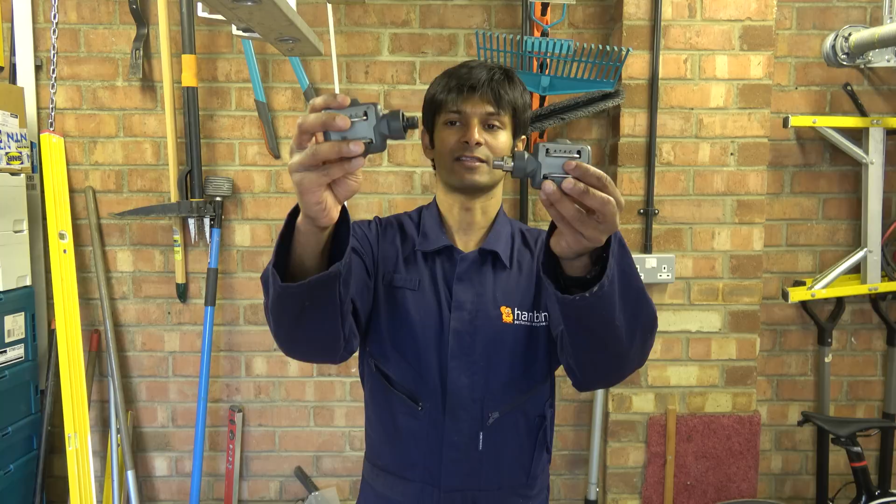Now these are a favourite of fixie riders, they all seem to use these, I'm not quite sure why. Anyway, the chap who sent me these has got a heel-in pedalling style, so what he wanted was the axle extended. So that is the new axle, that is the old axle. He couldn't quite muster pedal extenders because they would extend too much, like 14mm, and the usual trick of adding a couple of washers behind the pedals wasn't enough.

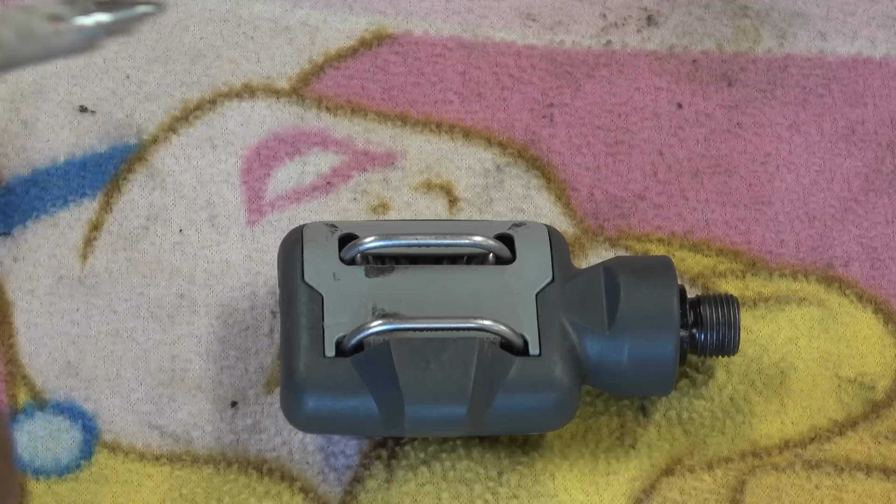So in this episode, I'm going to talk you through a teardown of this, which I'll tell you now is very well engineered, and this. So this is the Time ATAC pedal that the chap sent me. It is of, I suppose, late 90s, early noughties, probably even earlier than that, vintage. It could even be late 80s, I'm not quite sure. This apparently is one of the cheaper types that Time do, but nonetheless it is extremely well engineered.

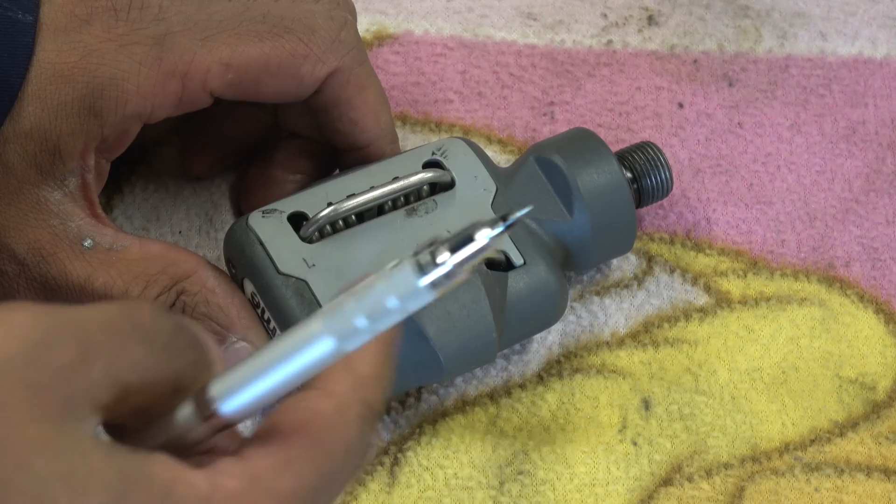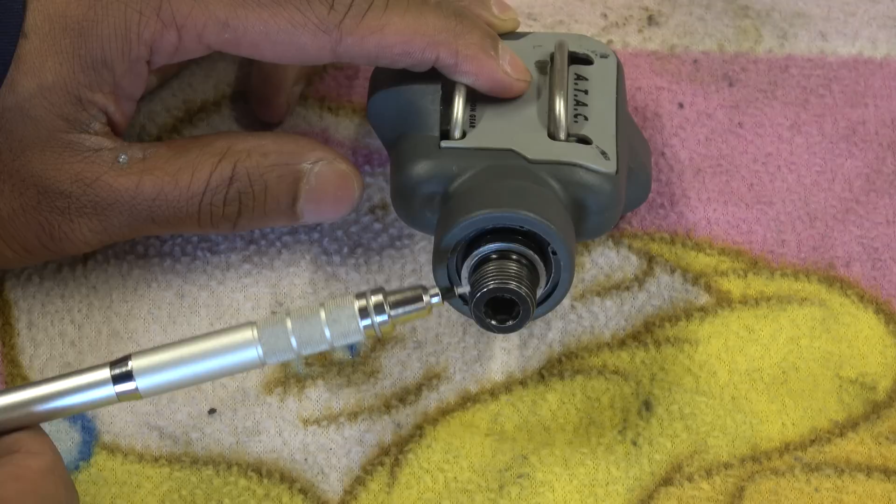So it's a moulded plastic body, double-sided, so you can put your feet in that side or flip it over. The spring retention is two single springs, a double spring - so the leaves are there, and there is one spring, and there is the other spring. The axle is through here, so we've got a 9/16 20 threads per inch thread to locate onto the crank, and then a preload system that is in here, and at this end there's a needle roller bearing.

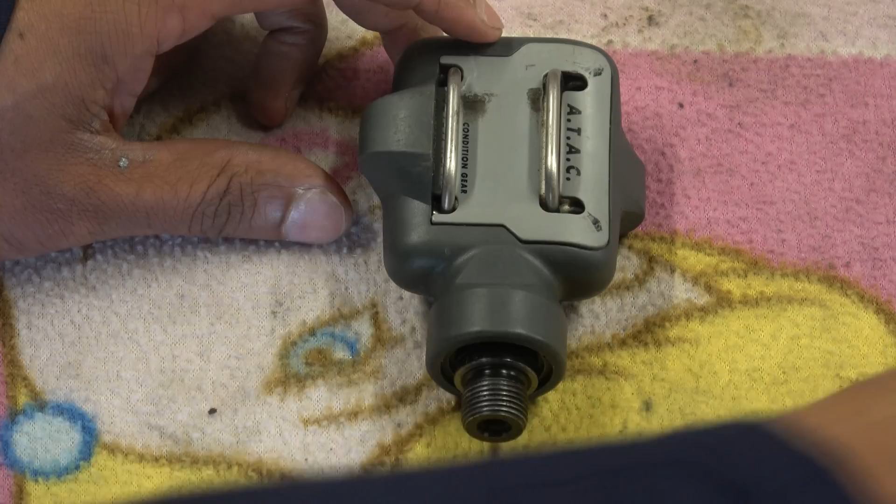So the aim of this task was to get from there to here. What I'm going to do now is I'll weigh this just to show you what it weighs, and then we're going to disassemble it.

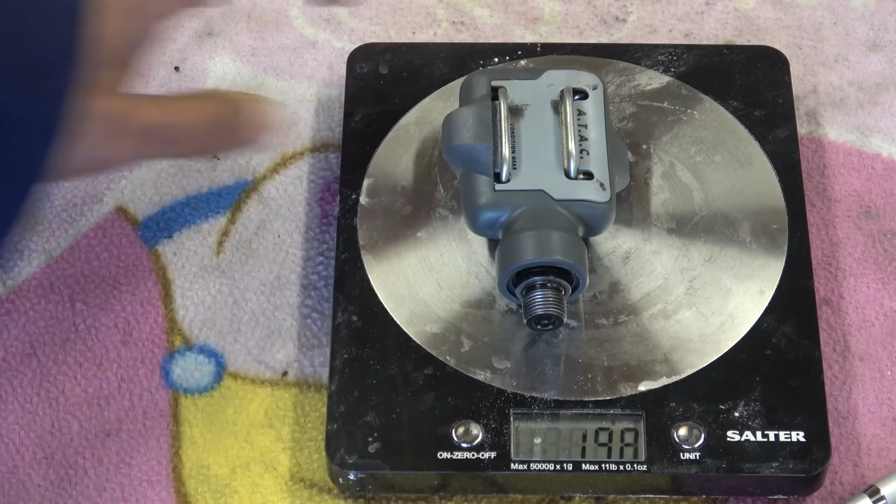For weight, we have 198 grams, which probably by modern standards is a bit on the heavy side.

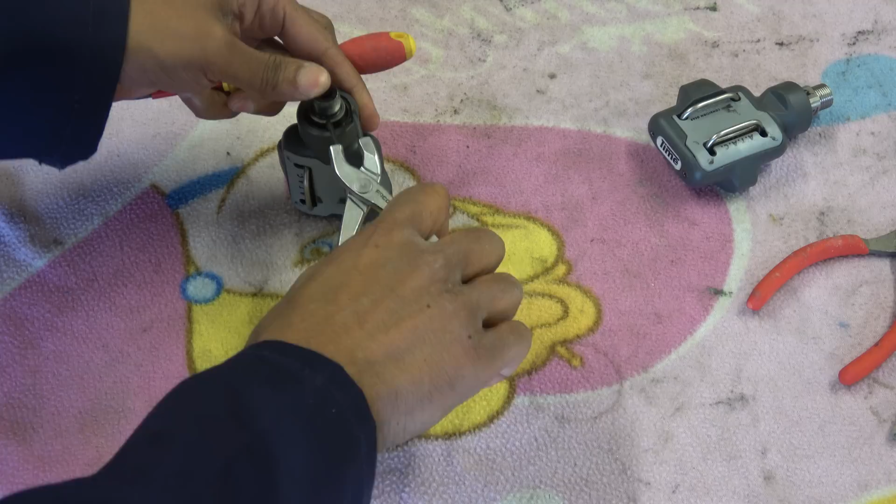Right, so to tear this down we need to remove this circlip, which is a bit of a fiddly job. So really you should clamp this up in a vise, but I won't be able to see it otherwise. Oh, balls. I might just fast forward this to show you after I've removed it.

And there we go, so that circlip's removed. Once that's removed we can pull the axle out - which is a bit tight.

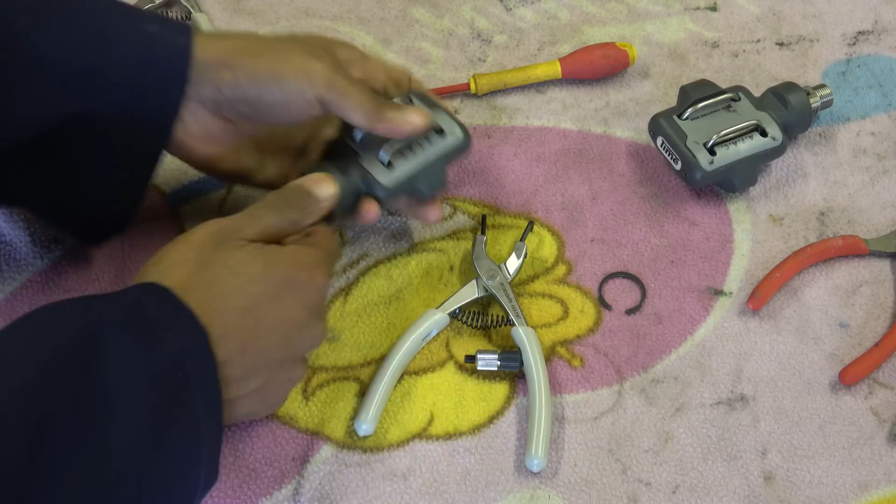So this is it disassembled. Now what you can't see, because it doesn't show up very well, is there's a bearing in there - a needle roller bearing that's probably sitting about here inside the pedal, so that sits on here. Now this surface has been hardened, it's quite obviously been hardened, so that takes only radial load. We've got an increase in cross-sectional size, and then we've got a circlip landing here, which I've partially removed.

The 6901 bearing here, and then a sort of seal assembly, a shoulder, and then the threaded component, and then finally into here is I think that's a 6mm hex. Whoever's designed this has really gone to town with it, they've really thought about it very well. It may not be an expensive pedal, but it's been very well engineered.

So the shaft is hardened here, it's been plated here, so it's not stainless steel or anything like that. They put an undercut in here, which is like a machining tolerance or a machining feature. There's another one there, and they've also put that circlip in there just to be sure to hold that bearing in. And there's another undercut there so that you've got full thread engagement if required. What I'm going to do now is I'm going to take this circlip off and then remove this bearing so that we can see what happens behind here.

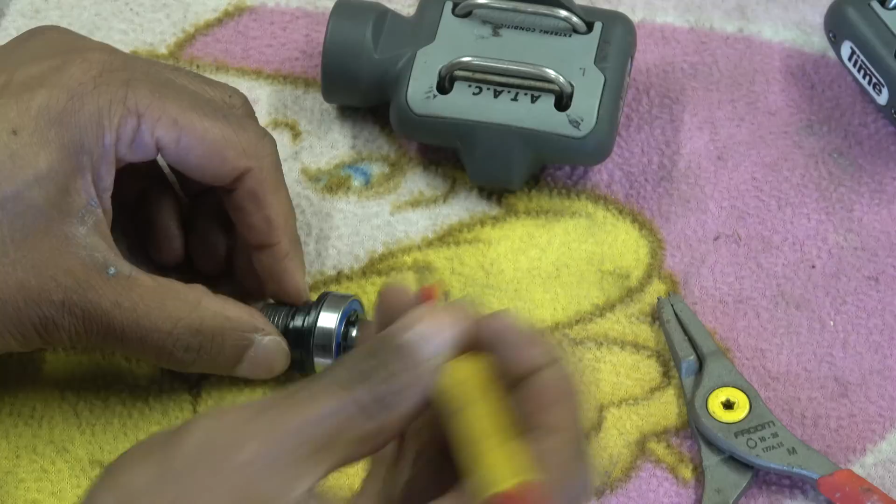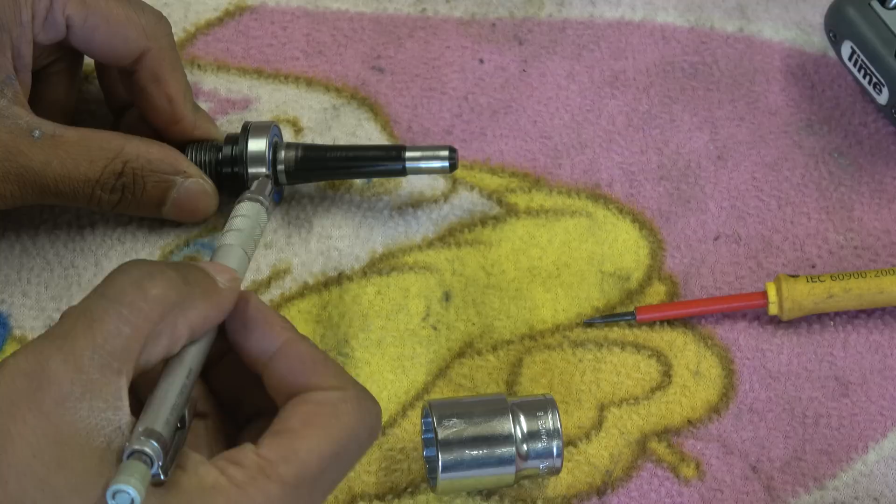This bearing is an interference fit onto this shaft, so the inner part of this bearing is a smaller diameter than the outside of this axle. In order to get this off, we're going to have to jack it off. We've got a socket here, I'm going to apply some load there, push there, and that should force that off. Might try it with a fast clamp first and then see if it works. If not, it's a job for the vice.

So this is the axle removed. I've laid this out in sequence. We've got this, which is the seal sort of cum preload system. It's a bit worn, this one. Just the inside's a bit worn, but for the modified one, it doesn't actually matter.

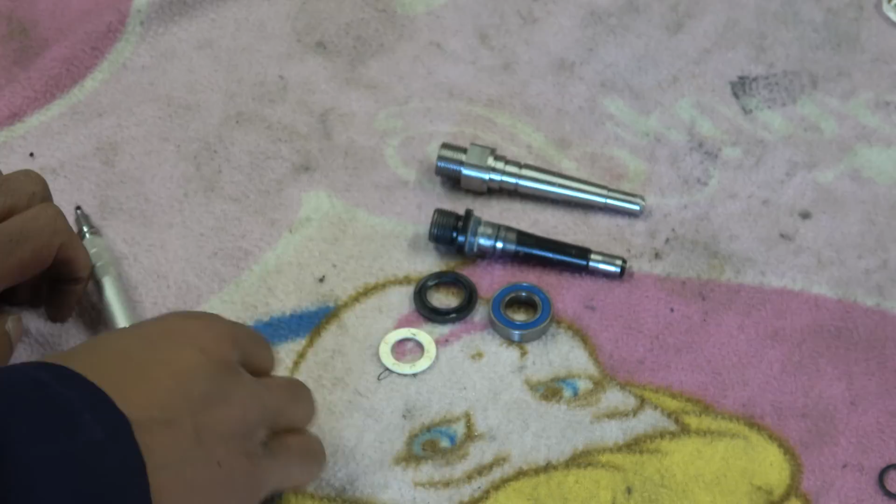This seal goes on here, which doubles up. The bearing that's been used has got an LH seal. It's quite unusual, an LH seal. Most NTN bearings usually come in LU, which is a double contact seal, and LB, which is a non-contact, and LH is a single contact rubber seal. So it's actually very difficult to obtain as well.

But going back to the axle, we've got a shoulder there, bearing landing here with an undercut there, circlip groove here, a chamfer - well, it tapers down - and then the hardened section here where the bearing goes.

The modified axle looks very similar, but instead of having a hex in the end, it's now got flats here. The shoulder that this sits on is slightly deeper, because the preload system and the bearing that's going to be used is subtly different. I've left the circlip landing in there, and then obviously we've got the hardened section there. The main difference is around the preload system, but I'll assemble this and show you how we get on.

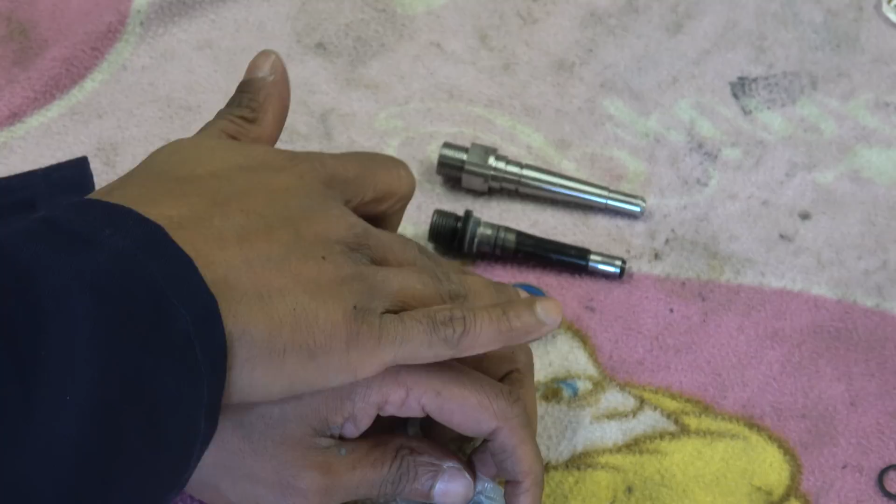So this pedal bearing is probably the most heavily loaded bearing on a bike. Pedal bearings are pretty small, given that they're probably going to carry your weight.

The replacement bearing has got a brown seal on it. It is an NSK 6901, and that has a slightly different interference fit onto here. I did ring up NSK just to be doubly sure, and they gave me the fit. So we're going to push that onto there as soon as we put this back.

Now, because of the way this axle is set up, we don't need this seal anymore. This will more than make up for it because it's a double contact seal. So we can put this on and then push that back down, and then we should be able to put the circlip back on. The preload system is set by this gap here - so that distance between that shoulder and there gives you the preload.

So to get this together, we're going to use that, which is part of the old assembly. Put a little bit of grease on here, bearing here, slide that over, and that is a 13mm extended socket. Pop that there and then push it all the way down.

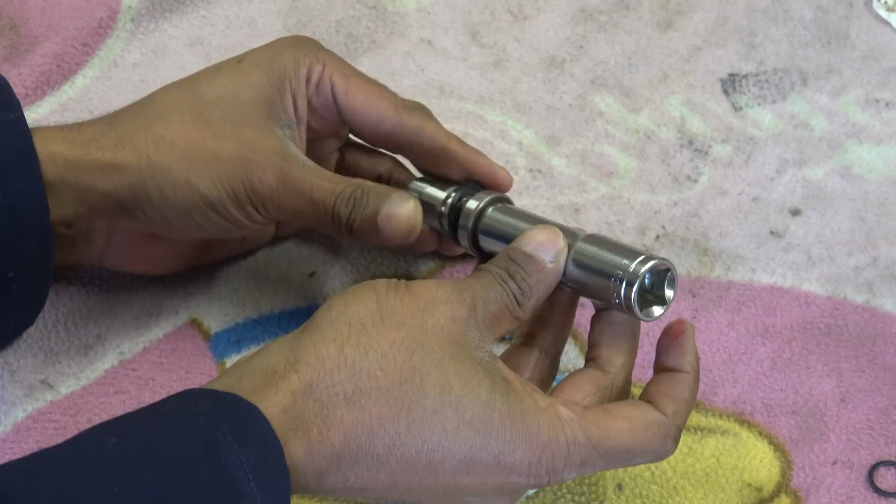Still got a little bit left to go. I'll do it with one hand - nigh on impossible. So we're all pushed up. You can see the socket at that end and the pedal at this end.

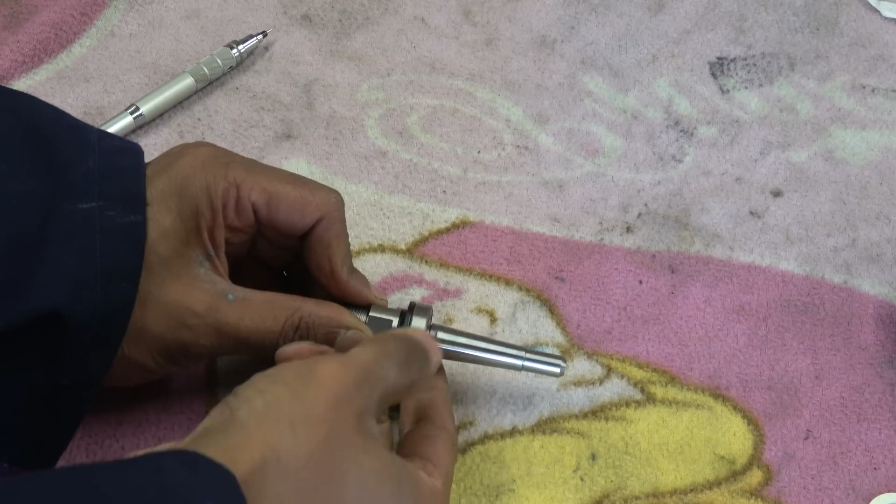Now we can reassemble this inside the pedal. So this is all assembled now. We've got the bearing on there, that's spinning nice and free - okay, it's a bit draggy because it's a double seal. And then the spacers there from where it was. And we've removed this piece - it's no longer required because there's seals on the bearing.

And we're going to put the circlip back on now. It's usually a lot easier to get them back on rather than take them off. So that circlip probably isn't required, but I've just put it on there to be safe. That's all secure. Now what we're going to do is put this back into the pedal body, get a bit of Mobil.

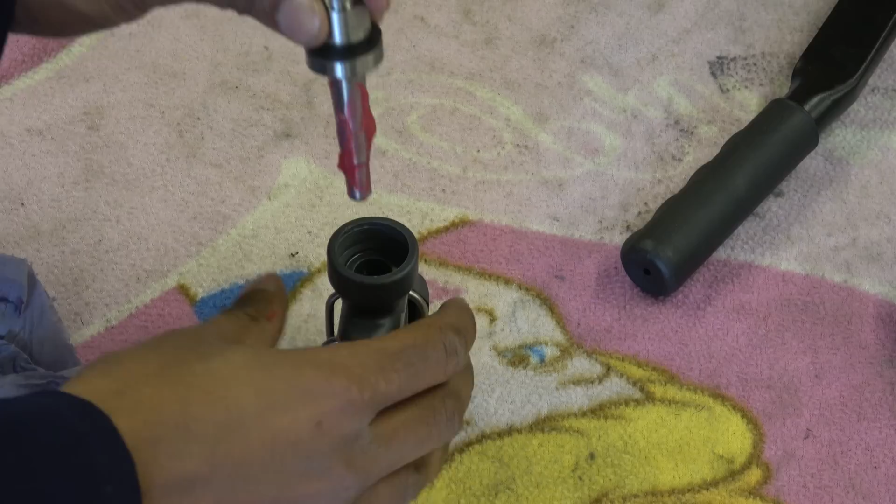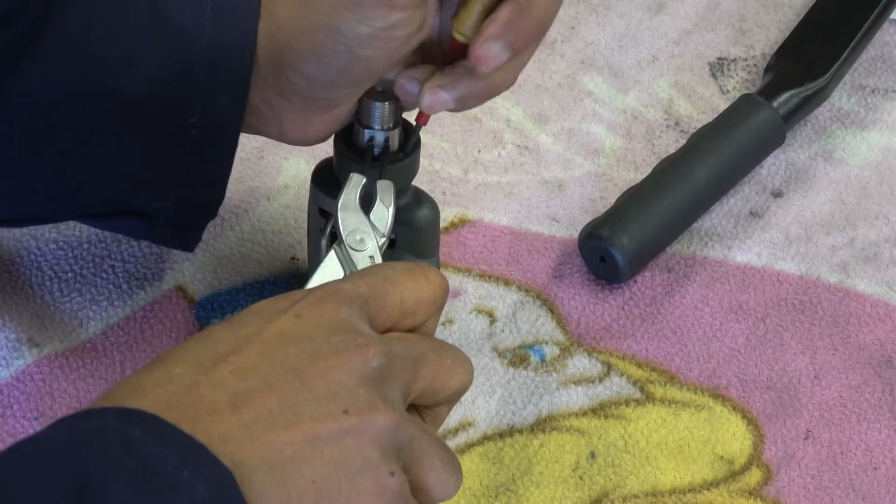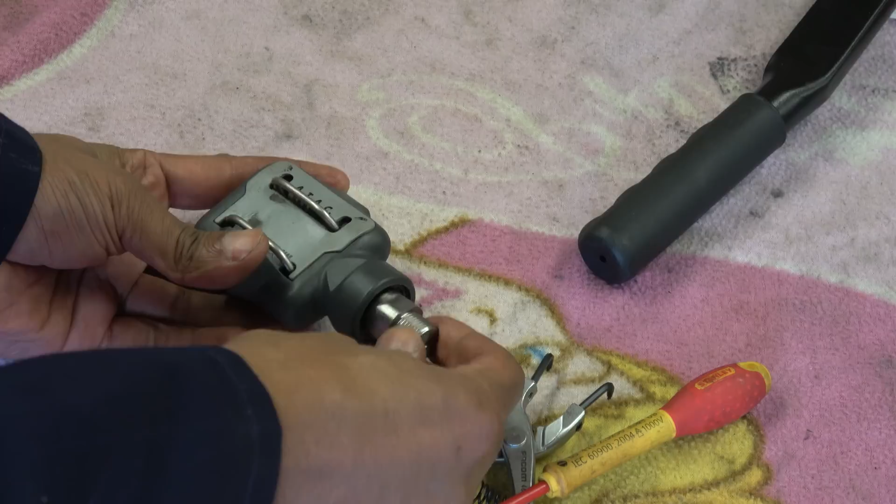Okay, so now we need to put the circlip back in. Make sure it's fully in. And that's it - so now that's fully assembled. That is the left pedal.

Now, this business about float and preload is quite important. So this is the original pedal, and if I show you the float on it, it's probably easier if you can hear it. So there's a fair amount of float in there. The replacement - there's hardly any in that one. You can't hear it.

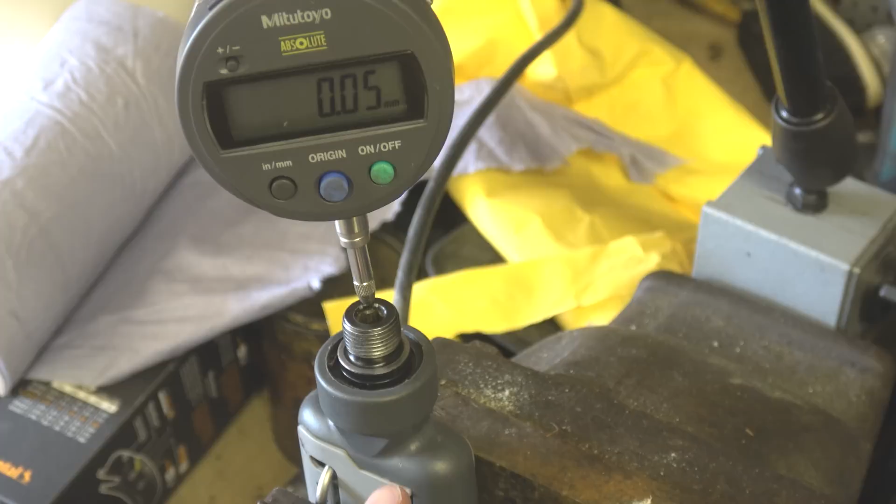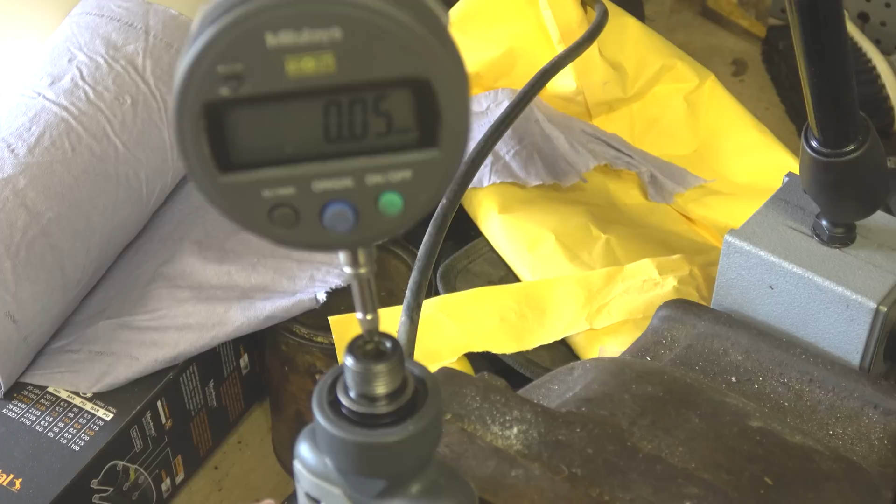So what I've done here is I have put the pedal into the vise and then put a DTI on the top of it. I've set this to be at the very top, so this needle will move up and down. You can see it's gone to minus 0.04 and then back up to 0.05. So there's about 100 microns, or one-tenth of a millimetre, of float in there.

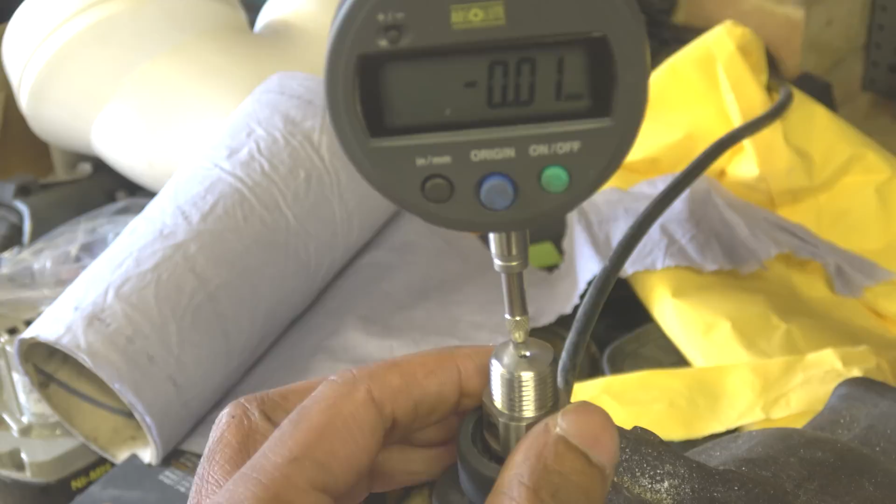So this one is the replacement, or the extended one, and we've got a lot less float in there. It's hardly anything really, 0.01, 0.02, so that's about a thou if you are in the States.

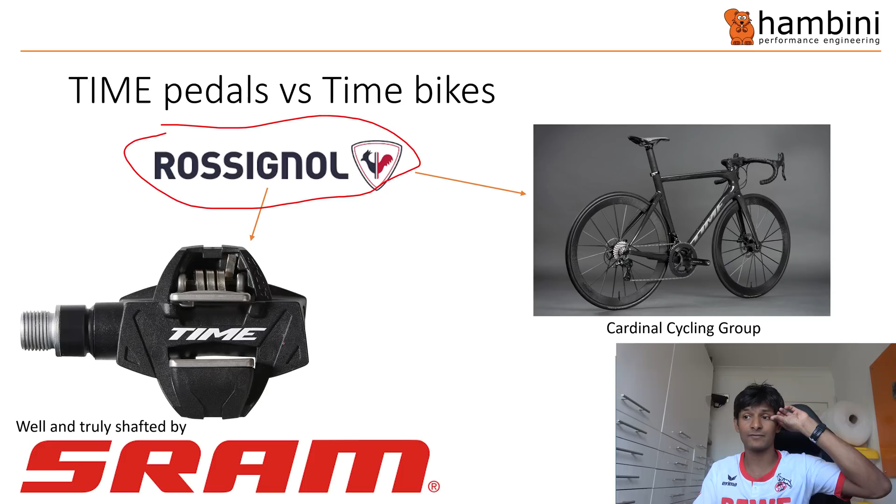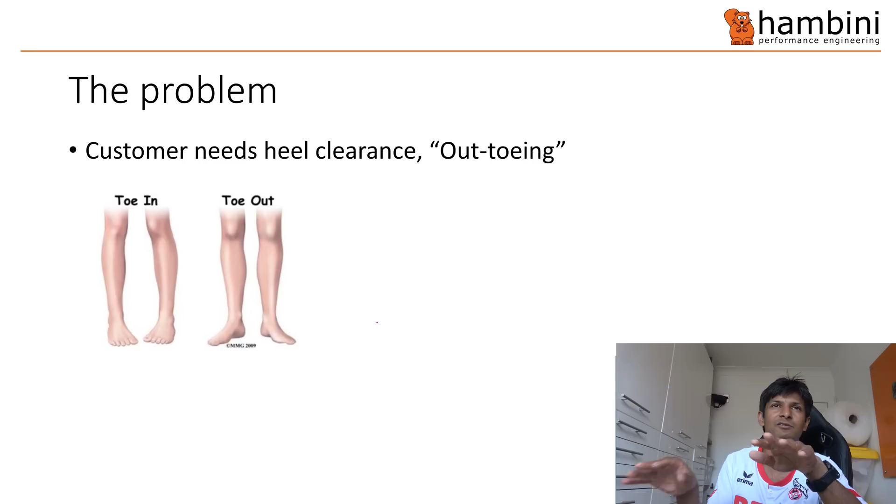So this is the problem for the customer. He has got toe out - his feet, the toes point outwards, and that's giving him a problem with the heels touching the crank spider on the drive side, or the crank arm on the non-drive side.

There are a few quick fixes to this, and this is what he has tried. He's tried the easiest fix, which is just to move the pedal outward slightly by using the washer behind the pedal. You've only got so much you can do with that because you reduce your thread engagement as you put more washers in. The other option is these pedal extenders - the pedal shims will give you like 2mm if you put a washer behind it, these pedal extenders will probably be 14 getting on for 20.

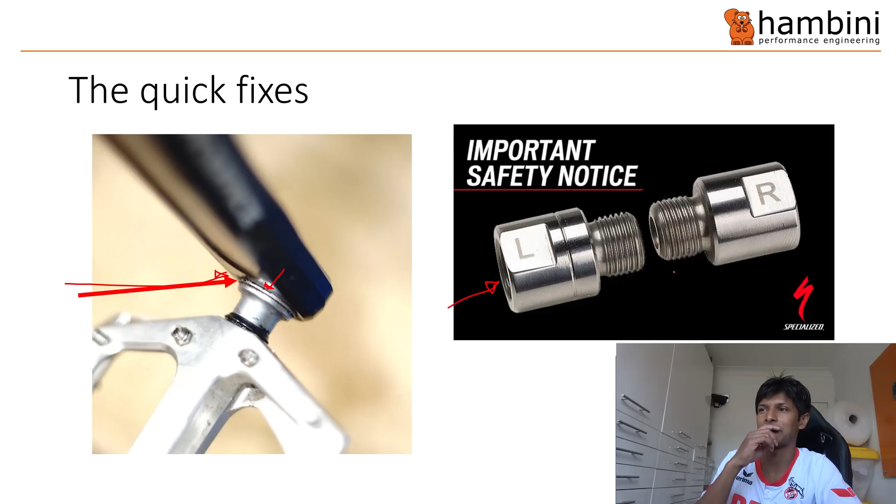There was a story not that long ago where the safety body in the States made Specialized recall all their pedal extenders, or they had to anyway. So yeah, you can do that.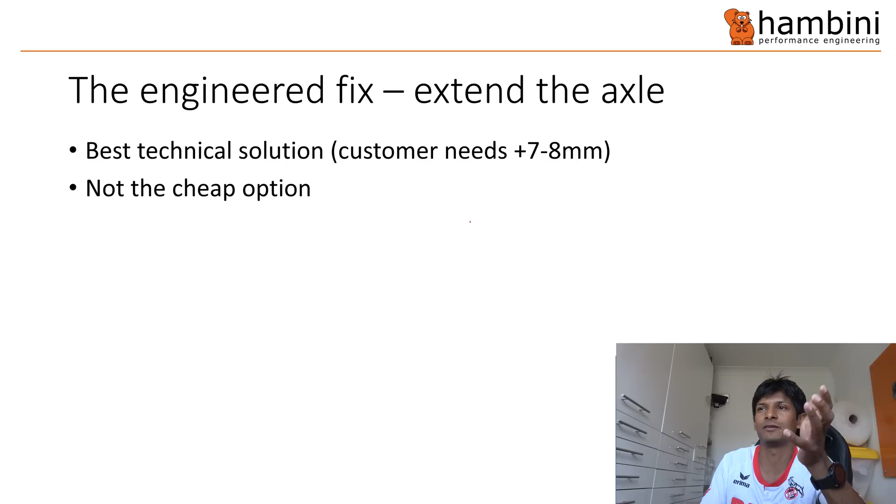The engineered fix - now the engineered fix is to extend the axle. The best technical solution for this customer, because he wanted 7 to 8mm, is that, because the threading thing might land you in hospital, and the Q factor is too much. It's not the cheapest option by any means, but if you want custom equipment, then that's where it goes.

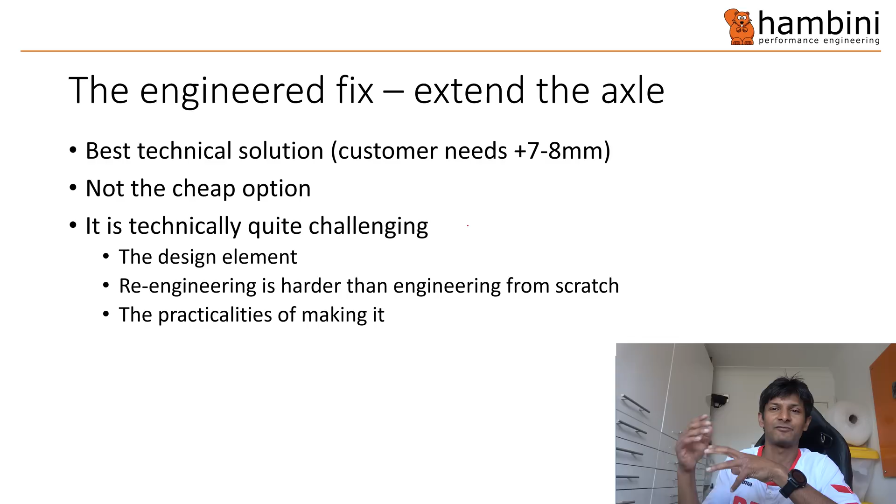I'll be honest, this one was technically quite challenging compared to the bottom brackets. I've done a few pedal axles - this one was a bit of a challenge. The reason it is technically challenging is because you've got the design element - you're re-engineering something that someone else has made, so you haven't really gone through the thought process of it, and the practicalities of making it, because it's quite small and fiddly.

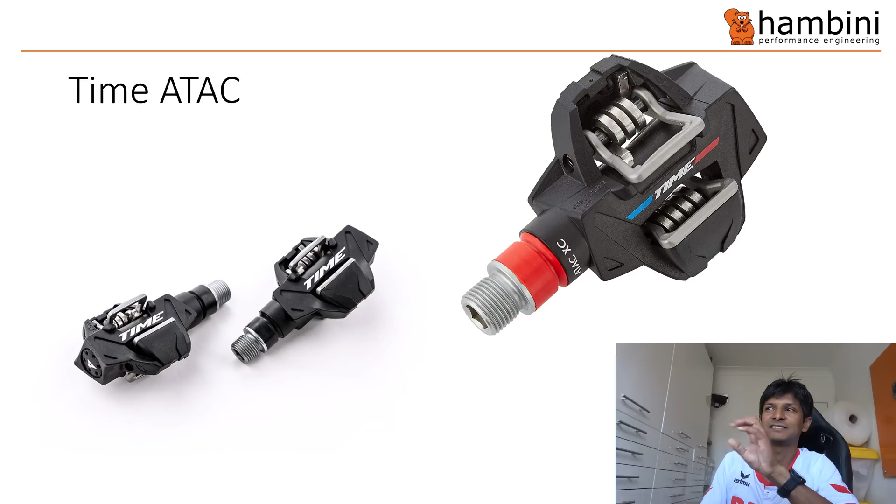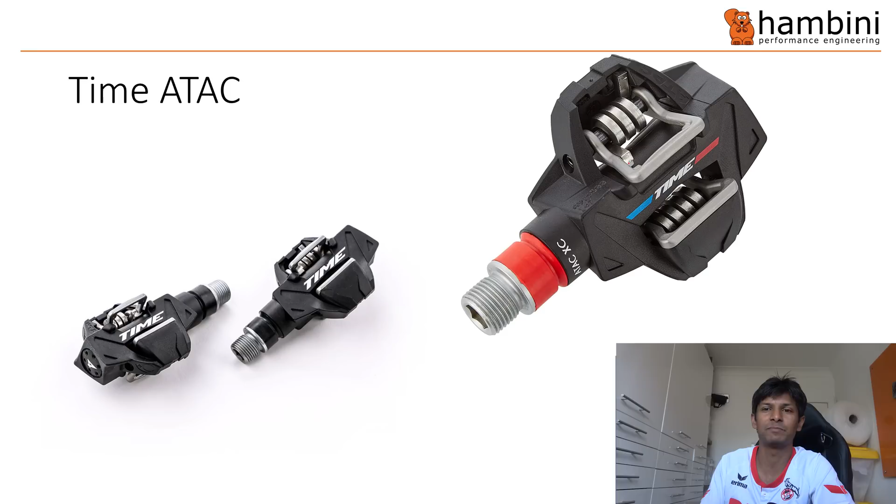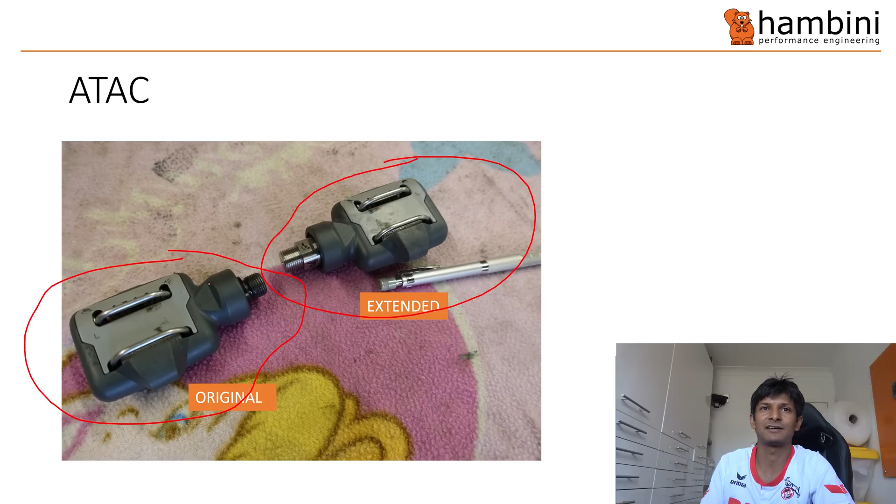Now, this is a well-engineered product, but Time are not perfect. When I got the pedal, you can see on one side this perfect round hole. What it is, these things are riveted down, and a punch tool comes down and then flattens it. On this side, the guy that's come to flatten it has missed.

So it's damaged the pedal body, and I think it's been like that from day dot. If you were to get that new, probably reject it, but it's God knows how old.

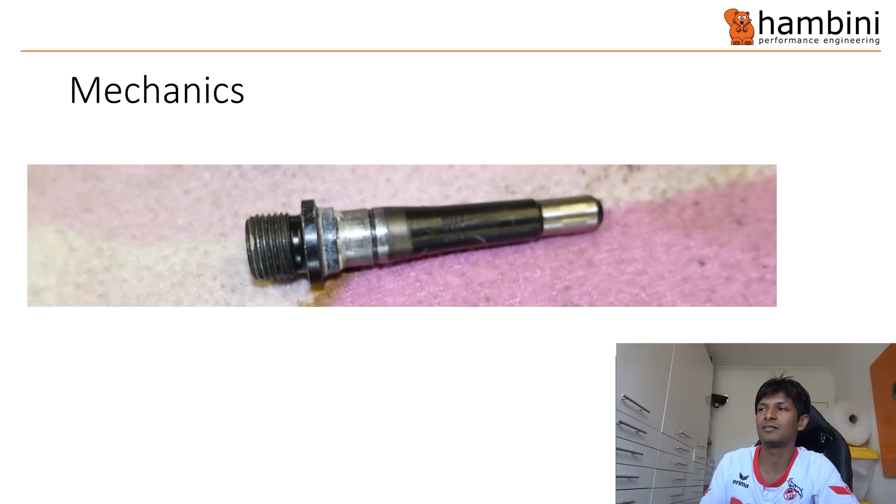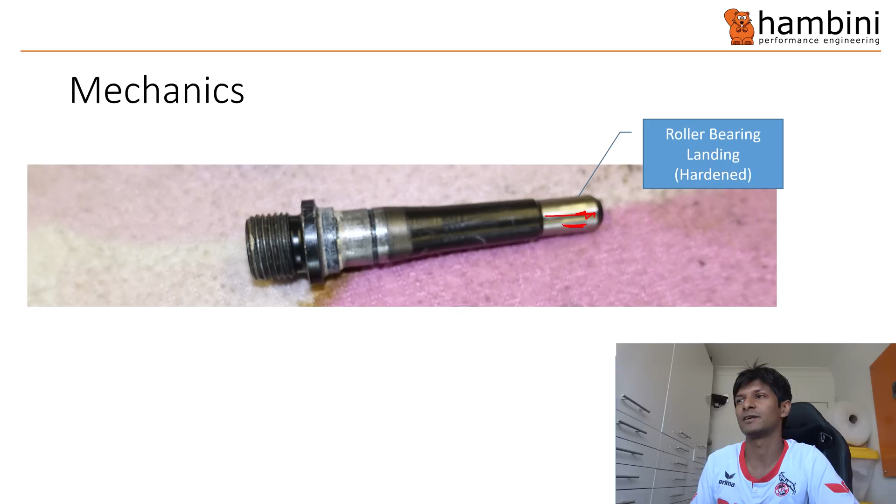So there you go. Right, the mechanics of this. Now, I've done this from right to left because when you are making it, you usually machine from the smaller diameter to the bigger diameter. So if I go from right to left, there's a needle roller bearing that sits on this surface here. It actually only sits there, but they've made the axle bigger for whatever reason, wanting to hold it or just because they can. It's got a lead-in chamfer there just to make it easier for you to get in.

There's a circlip here, which is probably unnecessary, but it's an axial position device as well. Normally you'd use it to hold the bearing in, but there's an interference fit on the bearing, so there you go.

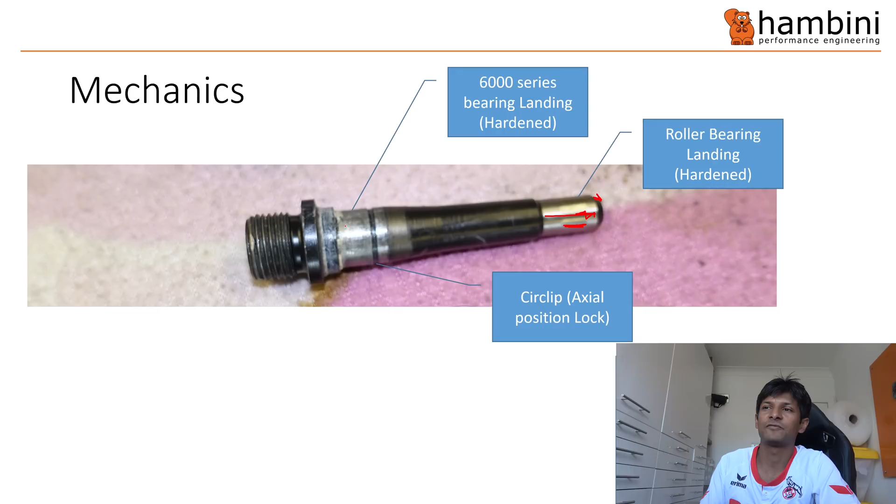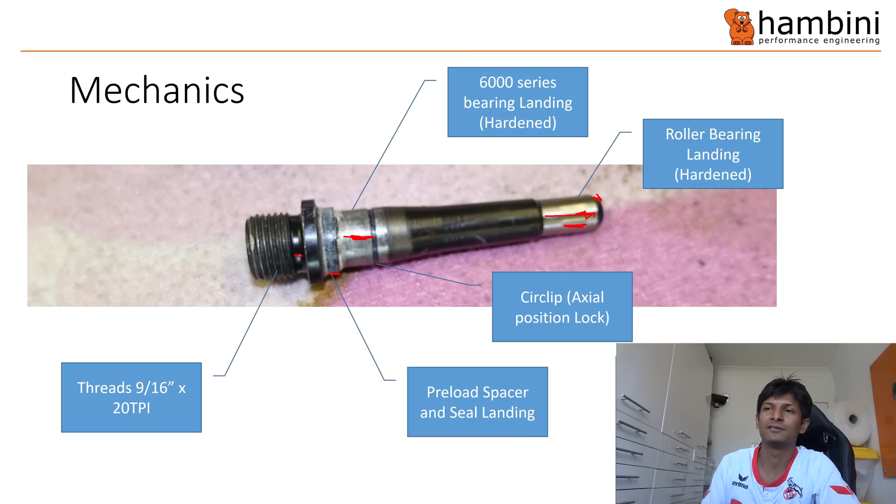6000 series bearing fits on that surface there. The preload spacer and the seal, so they're combined on the original, sit on this landing here. You've got the threads, which are here, and there's an undercut there, and then the female hex recess there.

Right, it is carbon steel, and it's probably forged. This is all hardened, so the bearing landings are hardened, and they've phosphate coated the rest of it. NTN bearings are standard. This is not something where someone has really skimped on.

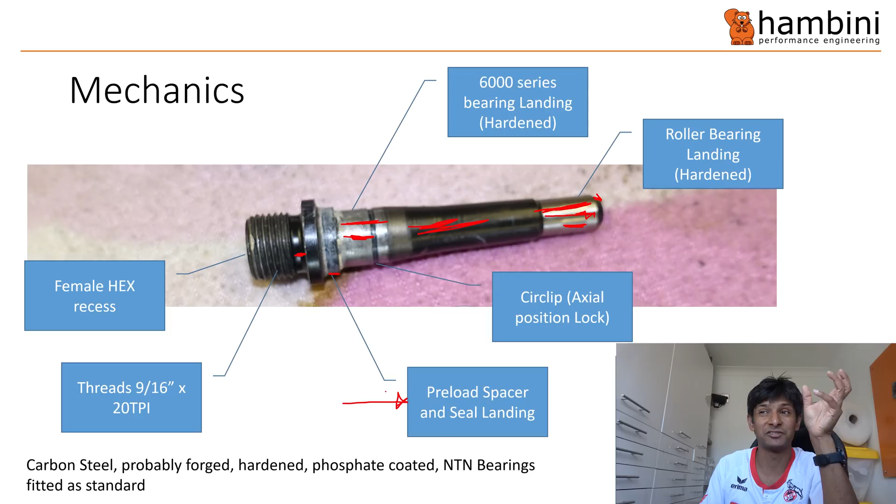The only comment that I would make where they've skimped is this preload spacer, because I've seen on the more expensive pedals they have a collar to screw in the preload system. Now, because I'm retrofitting, I can machine a little bit off to fix a preload, but not everyone's going to do that. In fact, most people aren't going to do that. So that's where the real cost saving is.

As far as the rest of the engineering goes in there, this is extremely well designed. So someone who has quite a lot of experience has made this, I mean, it looks like a fairly simple product, looks just like a pedal axle, but the features, the way it's been, subtle things like the way you'd hold it, the way you would screw it in if it's seized, those things, someone really has gone to town and looked at it. And the fact they've used an NTN bearing.

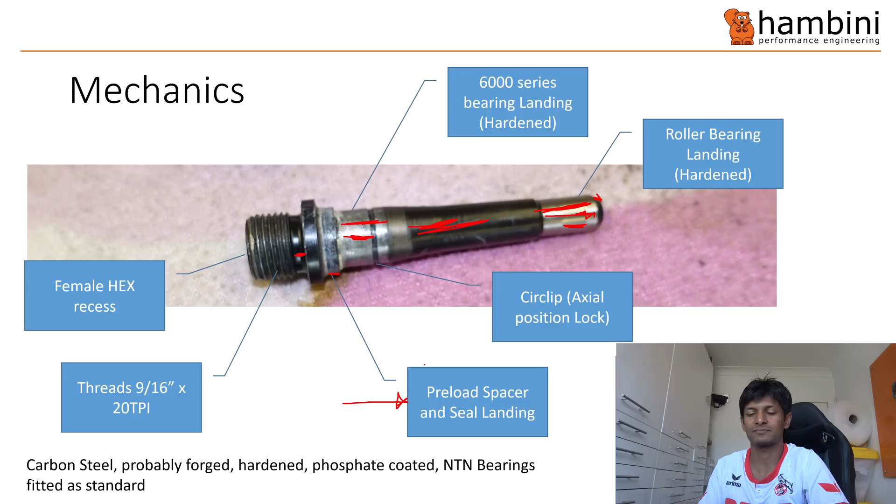Anyway, so this is very, very well engineered. What I've done here is I've shown you the mechanics of what's going on. So when you load the pedal up, you've got this force here, which is held by that needle roller bearing. So when you apply your foot down, it's taking that load.

You've got a small amount of that load that transfers into the radial bearing, or the deep groove ball bearing. And because it's fixed on this side, and that's what these arrows represent, the fixation point, you try and turn that, you try and bend that shaft that way. By doing that, that causes this axial component, so that deep groove ball bearing has to resist that load.

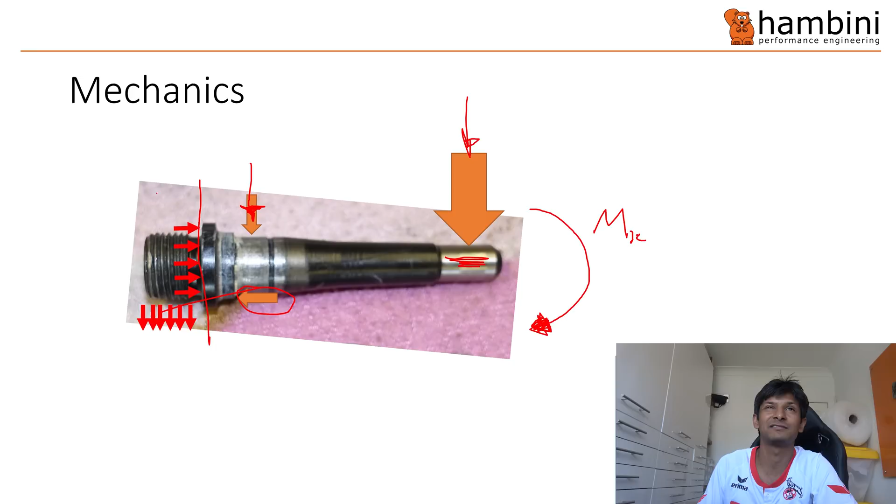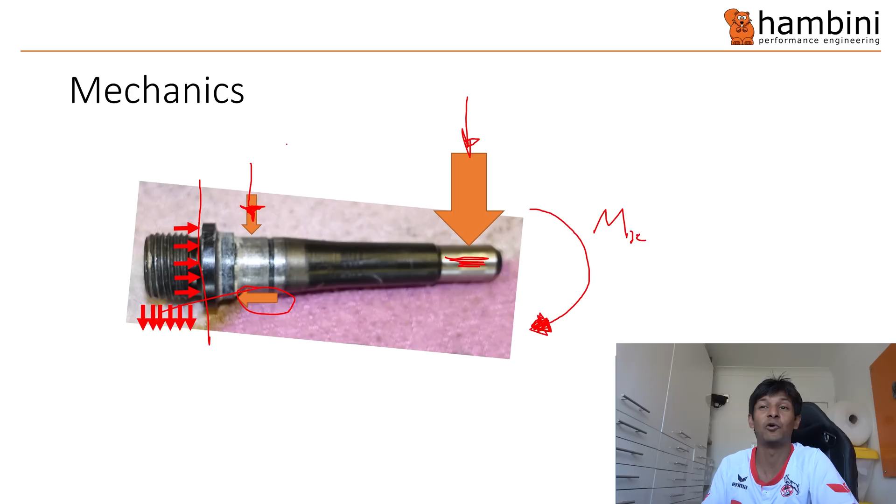Now when you make the axle bigger or longer, this moment, which I'll call MX, gets significantly bigger. So if you're looking at, let's say, an 80 mil shaft, and then you've lost 10 mil of it already because of the threads, you've got the remaining 70 mil, and you're extending it by 8 mil, you've got 10% extra torque, which is not insignificant.

Right, in order to do this, so some of the engineering behind it, I did some finite element analysis. And now it is, I hate sometimes this, it is the tool of choice for Hugh Jardons. So for people who come from university, graduates, they love this stuff because they always go on to ANSYS, and they can run rings around it.

The crux of it is I've noticed that the graduates sort of in the UK and off the continent, they are a lot more analytical and they don't have those practical skills. It's almost like a lost, dying art.

It is a lot more accurate than CFD. CFD has a large number of unknowns, for finite element analysis, it's a lot more accurate. It's extremely cheap, it's very quick, and it requires some interpretation with a bit of experience, but it is only as good as the boundary conditions.

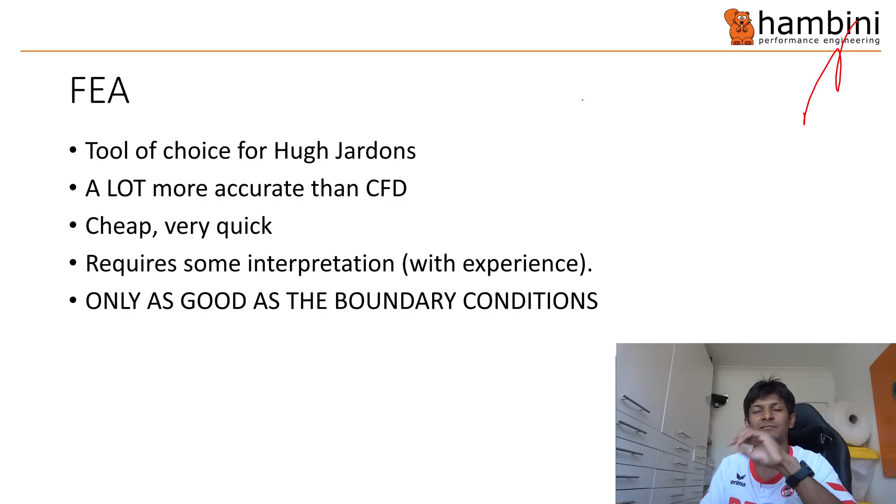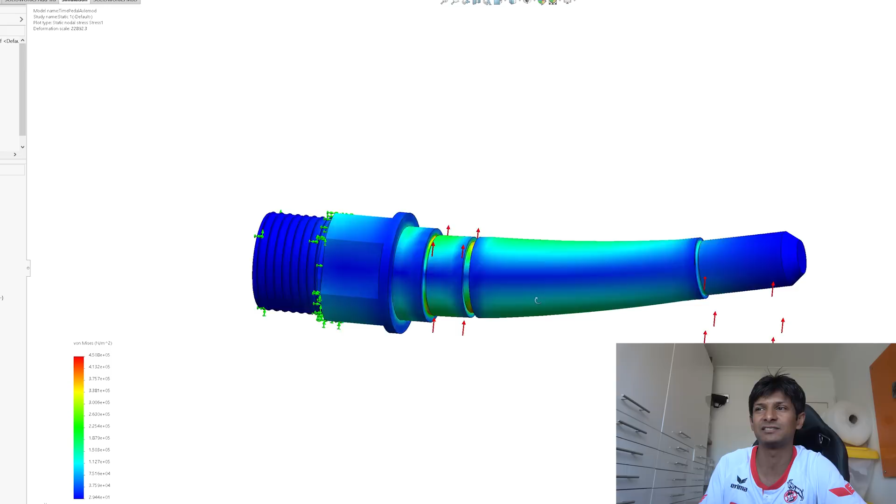Now you can see this. Now I've actually used SolidWorks for this. I wouldn't recommend you use SolidWorks, and the loads that I've applied aren't real loads. I've only used this for illustration, mainly because, as you all well know, lots of people have started copying my stuff, which is a bit of an irritation.

Anyway, this is the axle in the bent state. Now if we go to animate, if we slow that down a bit, you can see how this axle is bending. Now it's not going to bend anywhere near as much as that, but you can see the kind of point where you get the movement.

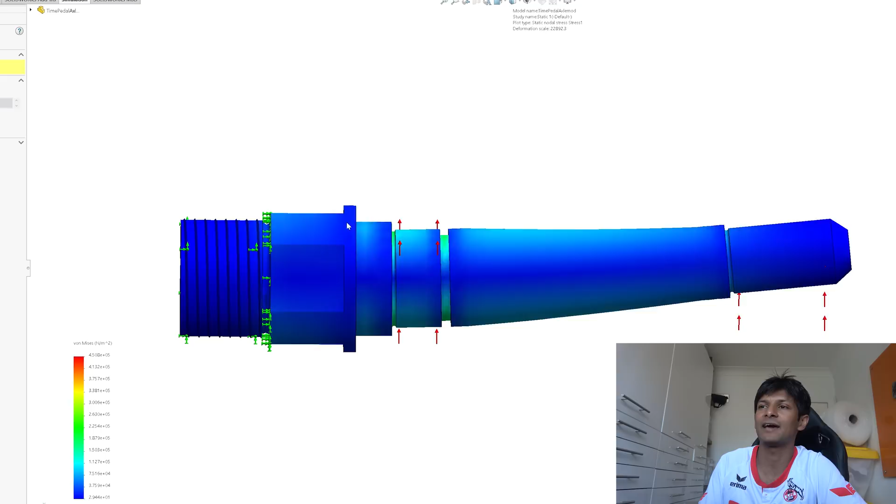So the stress raisers are around those circlip grooves, the undercut, and not so much at the other end. So the needle roller bearing, there isn't actually any stress there, because what have you got? It's only where it fixates itself to the crank arm where the problem is.

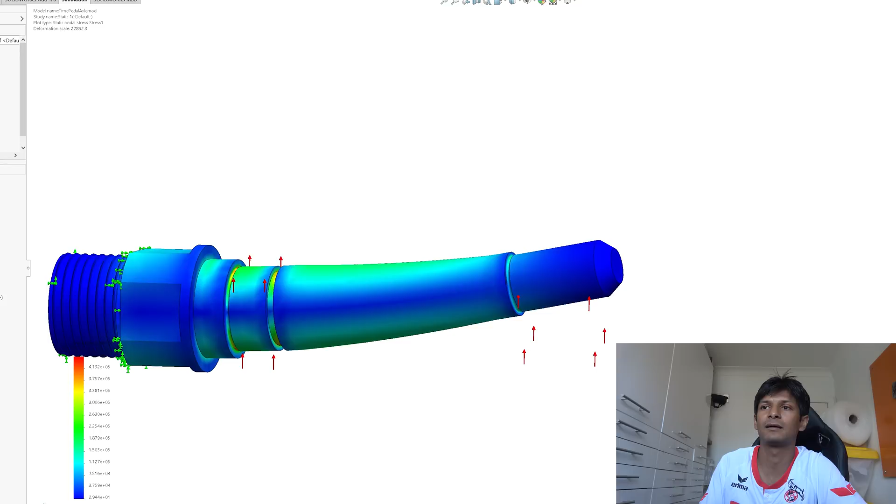Now if I go back—I mean, we can take a section through here, but we don't need to. What I'm looking for is any areas where it exceeds the yield stress of the material. So that's your first thing.

You also need to put in a safety factor there. Now, most industrial things use a safe life. So after 20,000 kilometers or 30,000 kilometers, they'll say that part is worn and you need to replace it. That used to be the case in aero until probably the 1970s and 1980s.

Lockheed started doing fail safe. So you build some redundancy in so that if the item should fail, you've got sufficient redundancy around it to take up the load. For this, it's so over-engineered that you don't need to apply that.

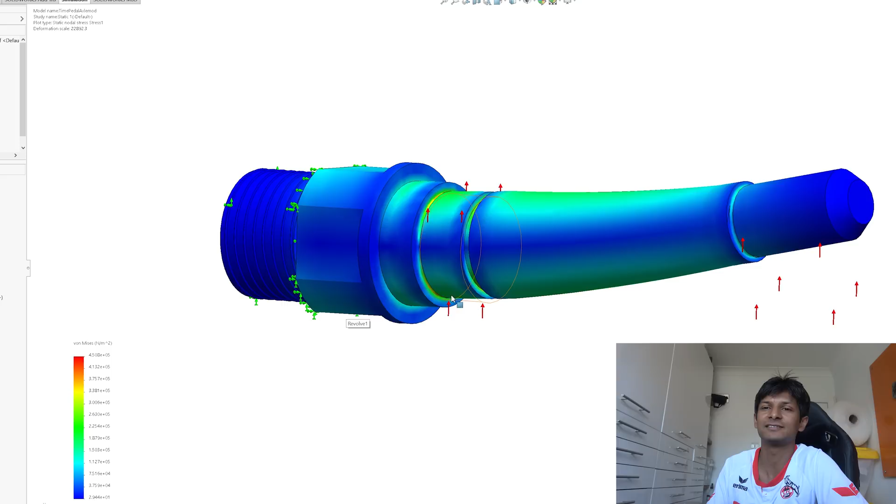And it became obvious when I did the stress analysis how well engineered it is. You would have to have some serious weight, forget the power, to get near trashing it. It would be very, very difficult to trash it.

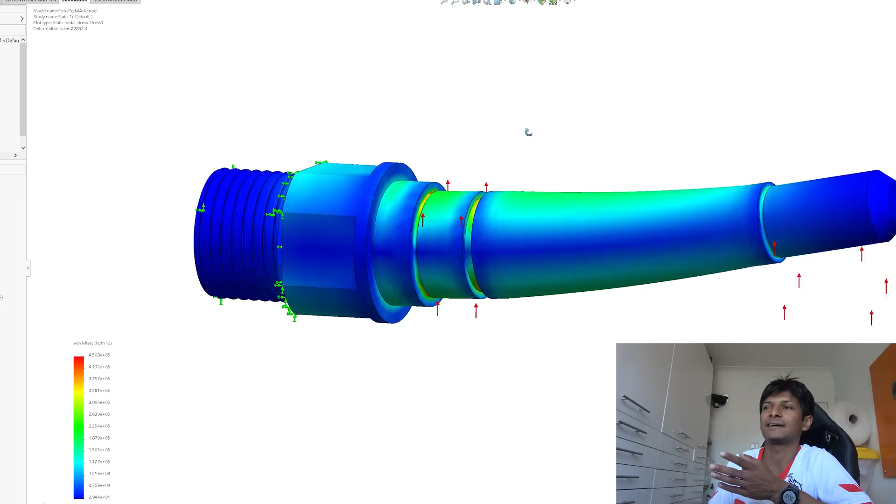Now, that's one element. The other element is how much bending you get. Now, you don't want excessive bending, and that's another thing that obviously you check for when you are designing.

So, this is the extended axle. If I talk you from right to left again, so we've got the bearing landing, same dimensions as OE, and I've made this axle out of stainless.

The disadvantage with making it out of stainless versus carbon steel that's been hardened is stainless is actually softer. The issue there is one of cost. So hardening something where you've only got two axles to harden is prohibitively expensive. I have obviously done the checks on it to see if it's going to gall and all that kind of good stuff, and it will be fine.

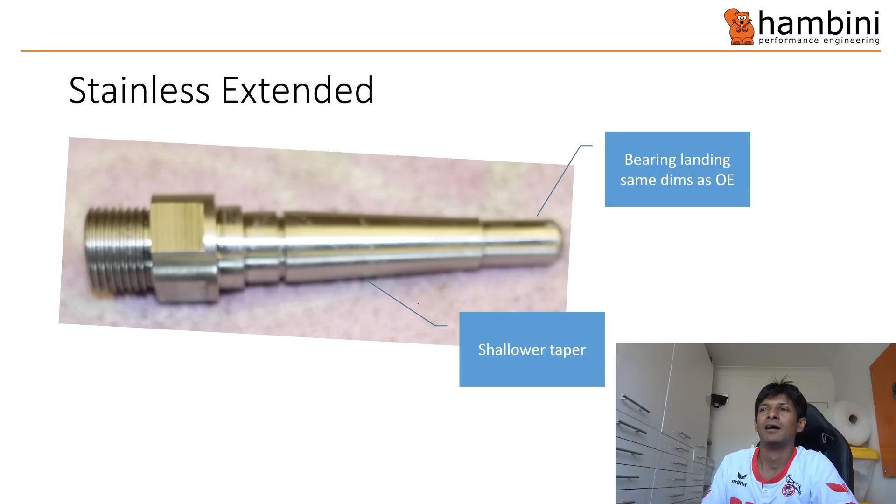The taper is slightly shallower because I could make it. I have a sneaky suspicion that the original axle was probably used in multiple different pedals, but there we go. The DIN circlip groove remains the same. It hasn't changed since the 1980s when the standard was developed.

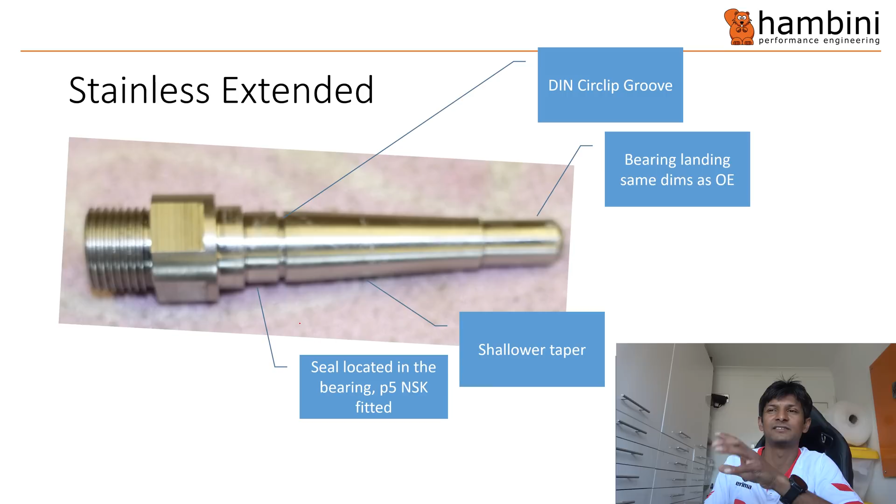The seal is located inside the bearing, so I've removed the seal that was originally in here. The bearing is an NSK. It's a P5 fit on that landing. Notice the small P because it's a male shaft fit and not a female M7 housing fit.

Right, and then the preload system is by shaft position. So the preload was a right bit of a faff to do on here, you have to just take a little bit off, check, a little bit off, check, all that kind of stuff. When I say it's a faff, if I was doing it like I made bottom brackets, I'd do it in like seconds. But the problem is I don't do that often, so it was a bit more time consuming.

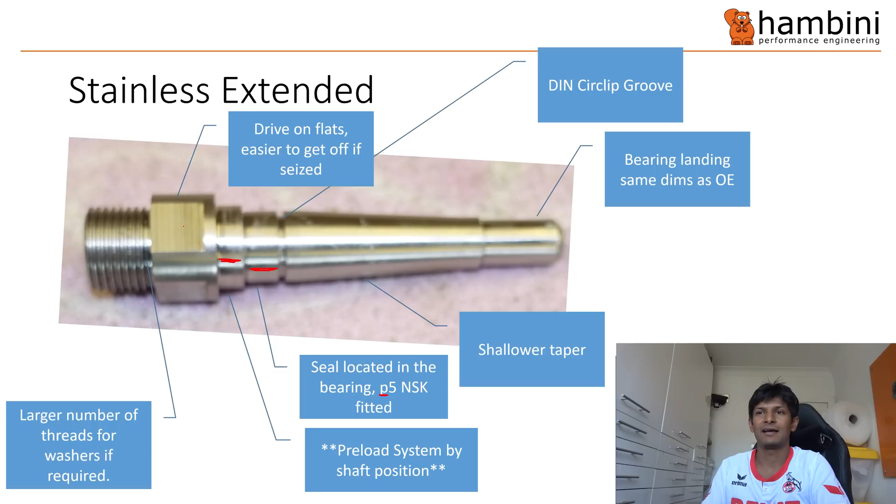I've put the drive onto flat, so to screw it on and screw it off, if you ever get it stuck, which regularly happens, getting it off when you've got flat to drive off is much easier than a hex. And I also increased the number of threads just in case he needed a little bit more, with an additional washer to give him another millimetre or so.